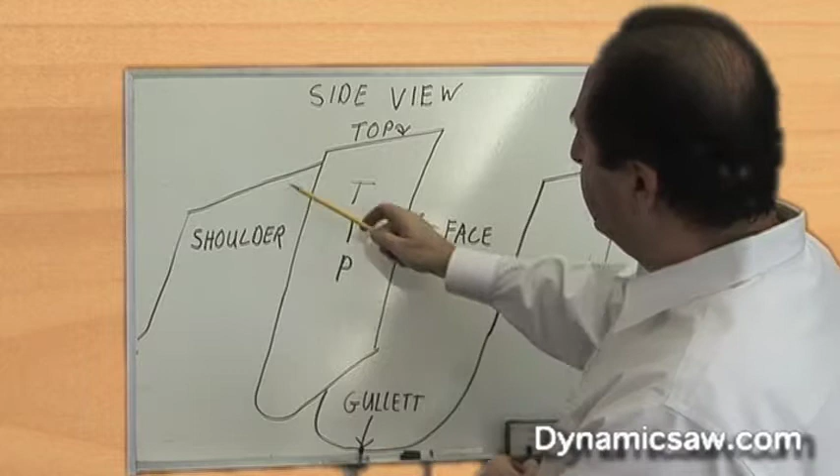We're looking at the side of your saw blade on a really close-up view. This is the actual carbide tip, this whole portion here. This is the shoulder, or the steel part of your saw body. All this down here is steel that the saw tip is brazed into. So this is the tooth tip, this is the shoulder. The face of the tip would be right here, this whole area is the face. This whole area up here is the top of your tooth.

When we sharpen your saw blades, typically we remove 3 to 4 thousandths of an inch off of the face of the tooth, and 6 to 8 thousandths off the top of the tip.

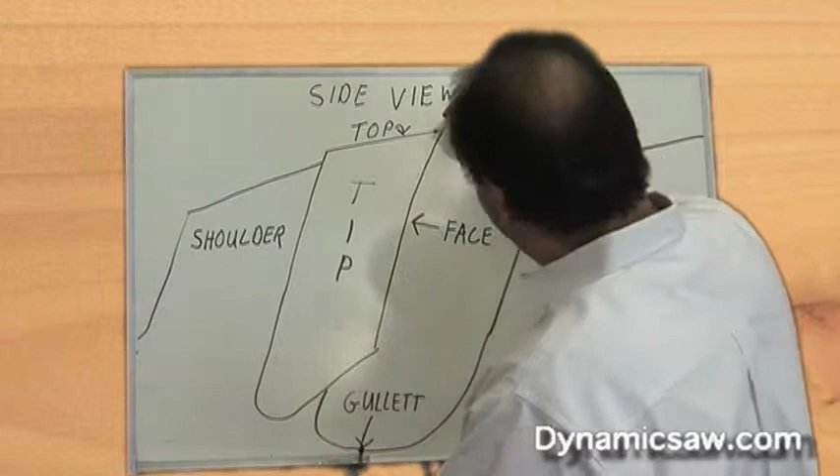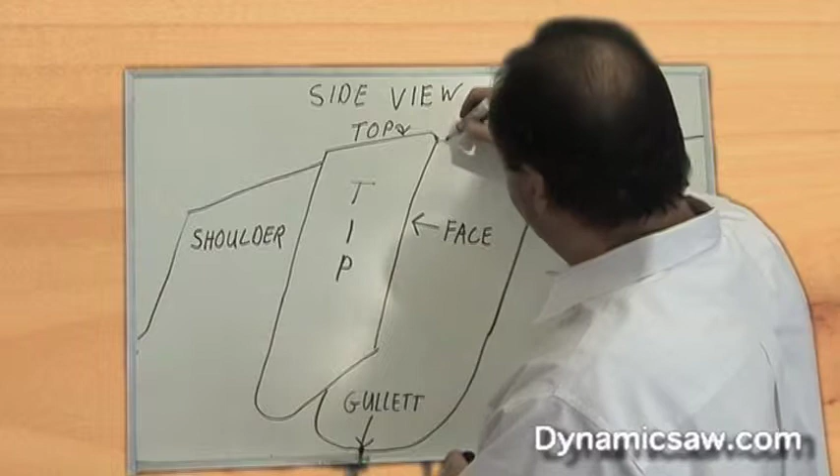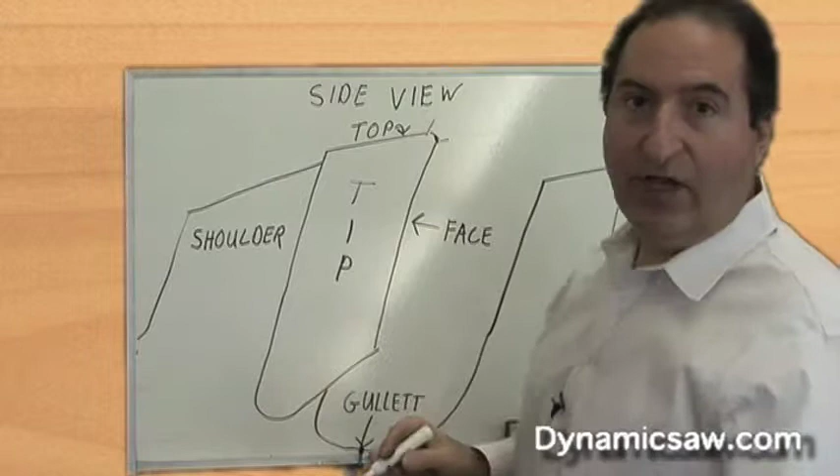Let me draw something in here. Let's say there's wear on your saw blade and it's worn right down to there. If I were to take all that off the top of the tooth, I'd have to come down this far off the top. We don't just do that. There are some companies that only top grind. There are other companies that only face grind, and they'd have to remove that much of the saw tip to get your saw blade sharp. We face and top grind, so we leave as much tip as possible.

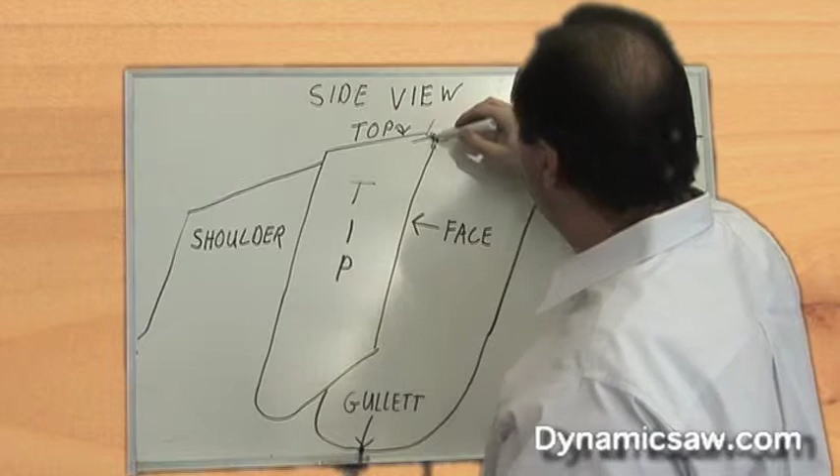It's really hard to draw on the scale that I'm doing right now, but by facing and topping, we'll get probably 15 to 20 sharpenings for you out of a standard carbide tip, and you get the sharpest cutting edge possible by doing that. We expose new tip itself on the face and the top. It gives you the longest life and the sharpest cutting edge.

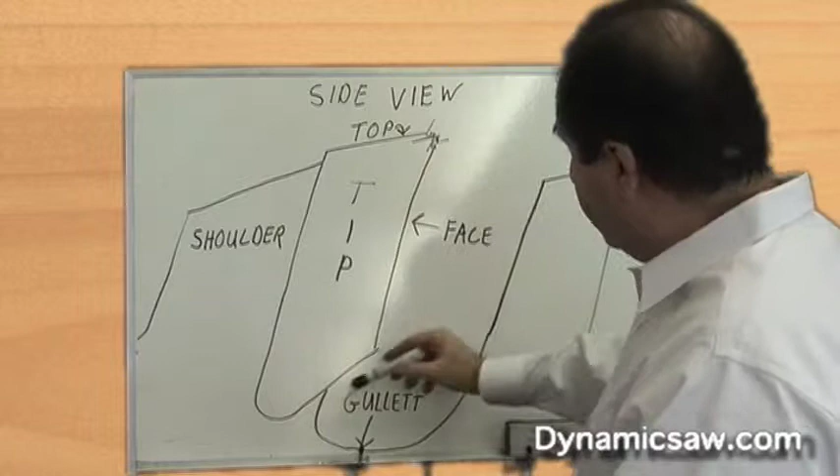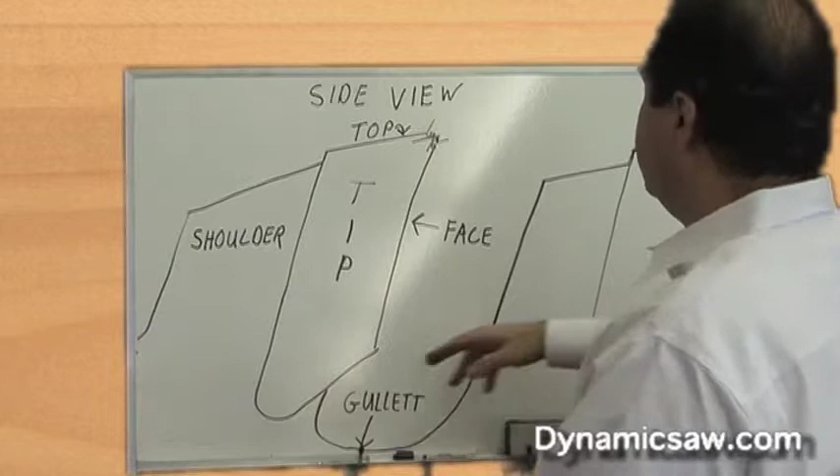This portion down here is critical. This is called the gullet. At the bottom of your sawtooth, as this blade is cutting material, the chips are being funneled down into the gullet. When the saw blade exits the cut on the bottom, it dumps or ejects all that material out.

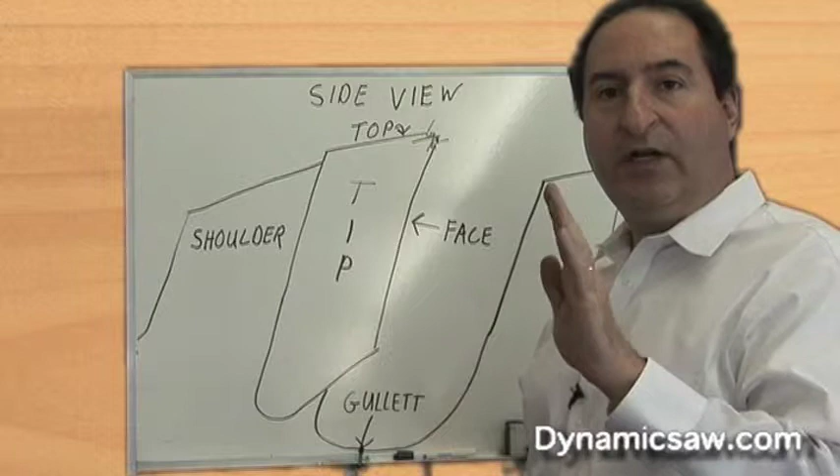That's very important for keeping the saw blade cool. A cool saw blade stays flat. As steel or the body of your saw blade absorbs heat, it's going to start to wobble. We want to keep that as cool as possible. So we want the sharpest cutting edges and a nice big gullet to throw those chips out of the way.

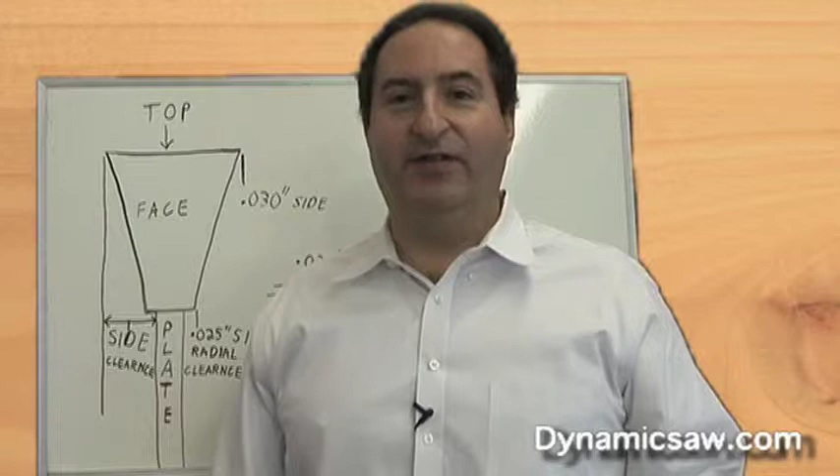Right now, I'd like to get a little bit deeper into saw science than you probably ever wanted to get into, but I think you're going to be happy that you watched this clip, because you'll find out why your cuts are really smooth. For any of you woodworkers wanting to do glue joint rips, or if you're cutting corian and you want perfect joints, or if you're cutting a piece of plastic and you've been having melting issues, I think this clip is going to really help you.

For this clip, the picture that I've drawn on the board, this is your saw blade. It's like it's spinning directly towards you. The face of the tooth is now coming directly at you, like you're the material, and that's the view I've drawn on the board behind me. This is a close-up, the best rendering that I could do freehand, of the saw blade coming directly at you. This is the face of the carbide tooth.

This is the top of the tooth. This is a straight top saw blade. This is the plate, or the body of your saw blade. Your arbor would be down at the bottom of the picture.

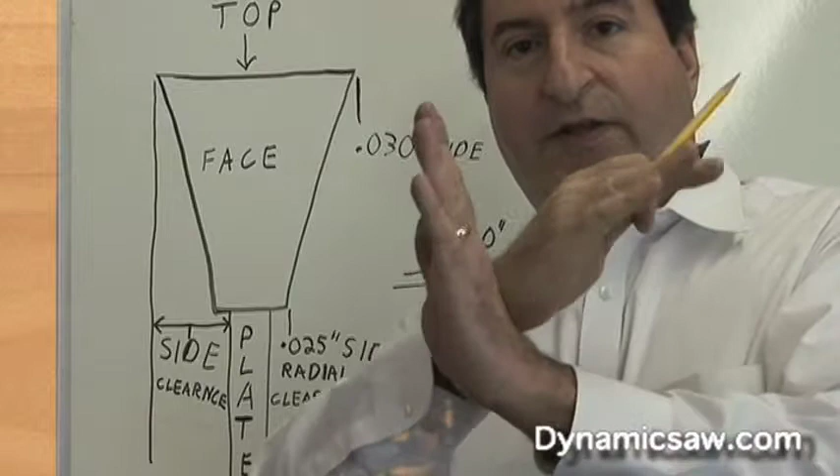Now, carbide saw blades are made different than steel saw blades used to be. Steel saw blades used to have the body of the saw, then the teeth used to be set left and right. That's called set. On a carbide blade, they're much, much more accurate, because we want a saw plate that's been smithed perfectly flat, and then the sides of the teeth have been ground with built-in clearance angles.

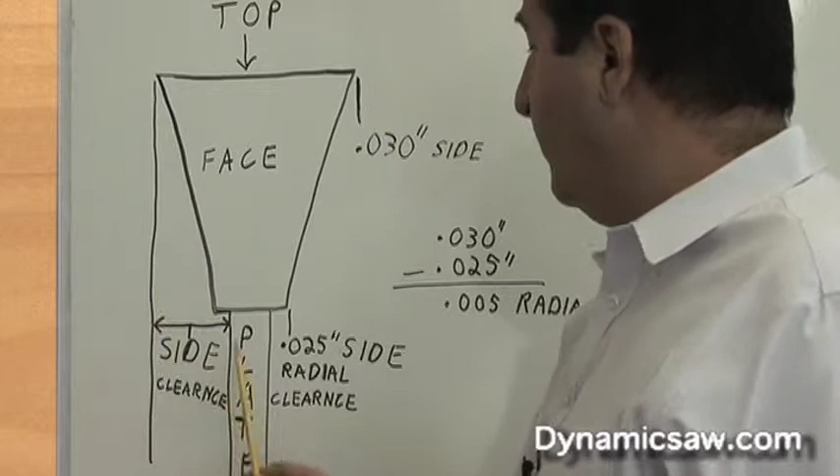When your saw blade is manufactured, it has a built-in top clearance angle, which I have to draw a different view for. It has a built-in side clearance over here. That's the distance from the top of the carbide tip to the saw plate itself. That's what side clearance is.

So we would take an indicator, we would measure from the top corner here to the plate. This particular blade, the way I've drawn it, has a 30 thousandth side clearance. Then there's another angle called radial clearance, which is super important when we're looking at the finish of your cut.

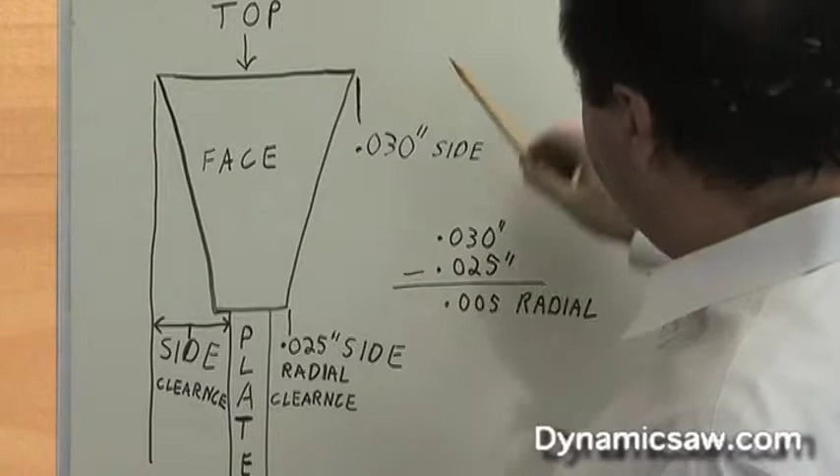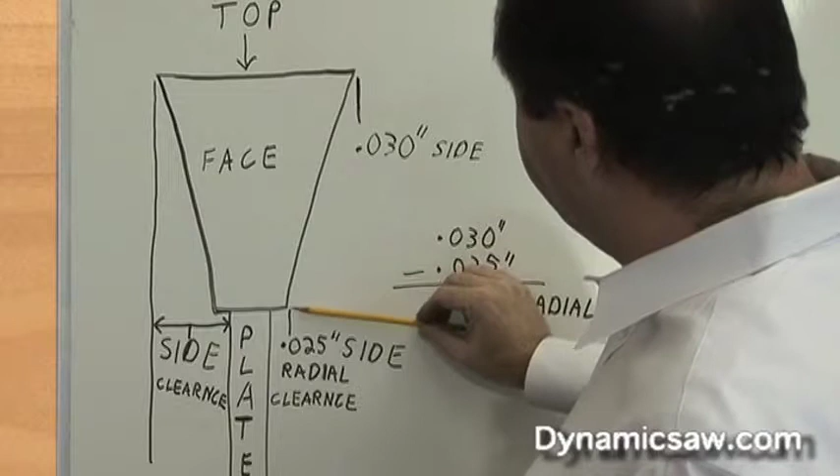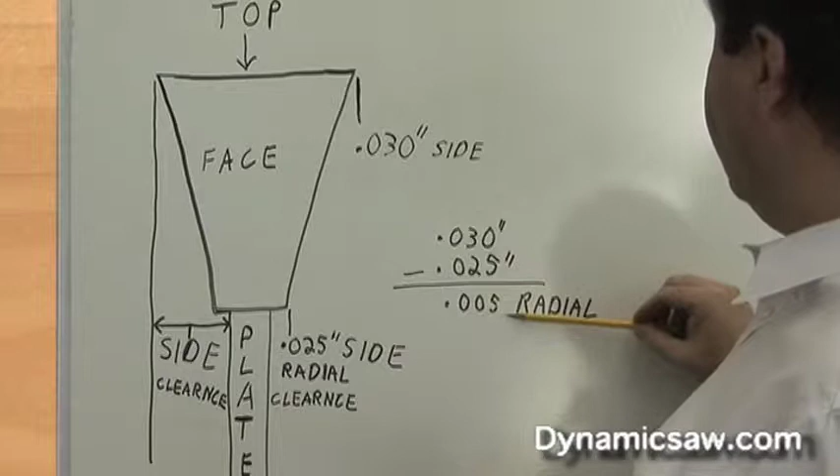Radial clearance is determined if you take an indicator and measure from the exact corner of this tooth. For this illustration, it's 30 thousandths of an inch. Then you come down to the bottom of your tooth, which has 25 thousandths side clearance. So 30 thousandths minus 25 thousandths gives us 5 thousandths of an inch radial clearance, which is wonderful clearance for doing most woodworking.

Forgive me, my hands are now the sides of your saw tip. This would represent a saw blade that has high radial clearance, very far apart at the top, close in at the bottom. That blade is going to cut very cool.

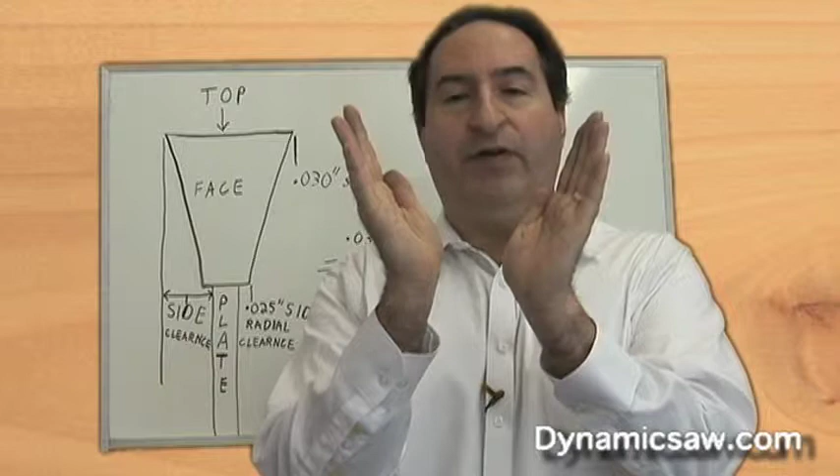If you're ripping a board and you want to get through it with an easy push, and you're not really concerned about edge finish because you're going to joint it afterwards, you want a blade with a lot of radial clearance. Also, if you're using a low horsepower saw or running on an extension cord and you keep popping your breaker, you want a high radial clearance saw blade. It's going to push very easy.

Conversely, if I want a really smooth cut or a glue joint rip, I want low radial clearance. So I want the top of the tip to be almost the same kerf as the bottom of the tip. That's going to give you a mirror edge on the side of your wood.

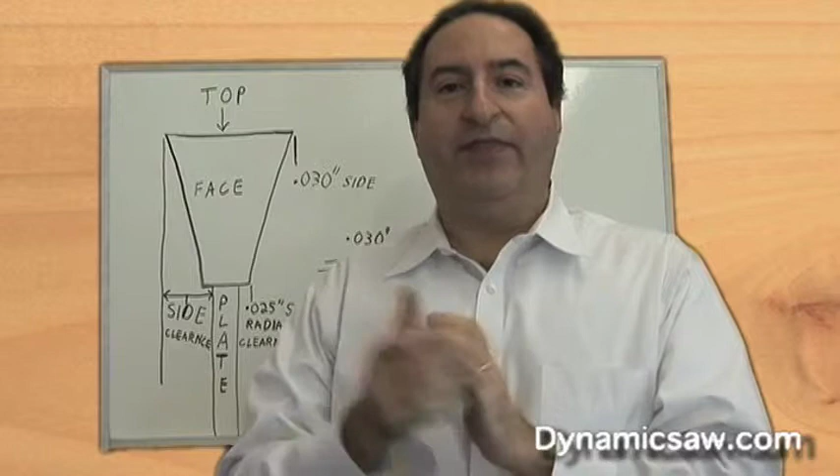Actually, we've had to make saw blades a little higher radial because we've made saw blades cut so smooth that the glue doesn't want to adhere to it - it's too smooth of a cut. So you don't want no radial clearance, and you don't want too much radial clearance. It has to be made for your application, and we can give you recommendations on the proper radial clearance for what you're doing. That's why Brian and I will ask you a lot of questions about your application, what machine you're using, how much horsepower you have, and what type of finish you're looking for. All those things help us give you the proper saw blade.

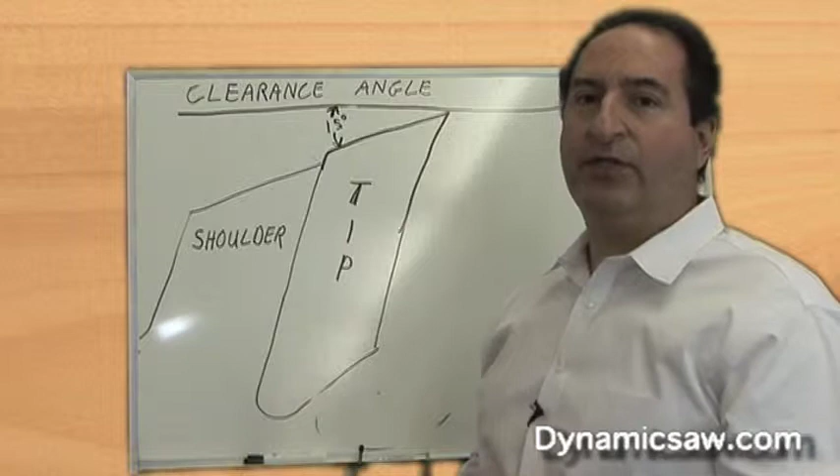We have some very specialized clearance angles that we've tried over the years for different materials. But a good rule of thumb is if you're cutting a soft material, which wood would be compared to steel, we'd use a clearance angle like this, a 15-degree clearance angle. The denser the material you're cutting - if we're cutting aluminum, we're going to alter the clearance angle; if we're cutting brass, we're going to alter it, all the way to steel. When you're cutting ferrous steels - and believe it or not, we sell a complete line of saw blades to cut ferrous metal with a carbide tip circular saw - we want a lower clearance angle. But just so you understand, this is what a clearance angle is.

In this clip, I'd like to describe to you what kerf is, just so when we're talking on the phone you know what it is. The kerf of your saw blade - if this is the saw plate, and this is the face, like the blade were coming directly at you - the kerf is the widest part of the sawtooth, which would be the very top corners. If the blade's made properly, it's the top corners. That is the kerf of your saw blade.

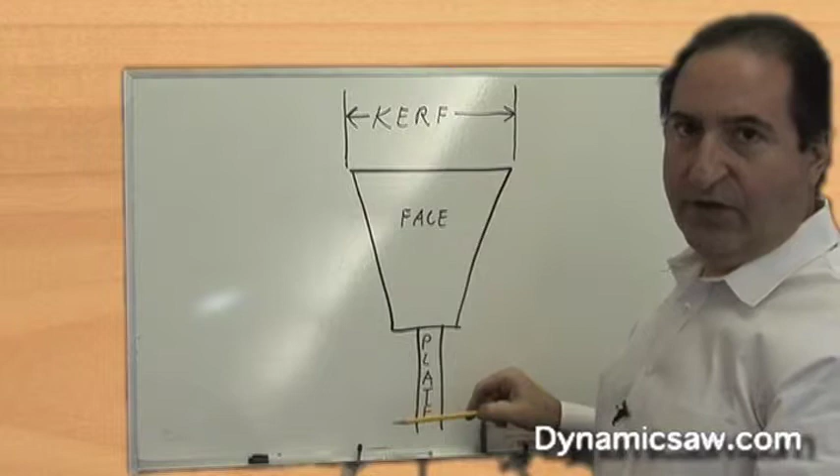There's some good rules of thumb. If your plate thickness is an 85 thousandths thick plate, then a standard kerf is a 1/8 inch kerf. If you have a 120 plate, 180 thousandths kerf is standard. There's some standards in the industry, but everybody does different things. Some of you guys need thin kerf saw blades. We have saw blades down to, I believe, 55 thousandths of an inch kerf, so the saw bodies are down around 35 thousandths - very unique for very special applications.

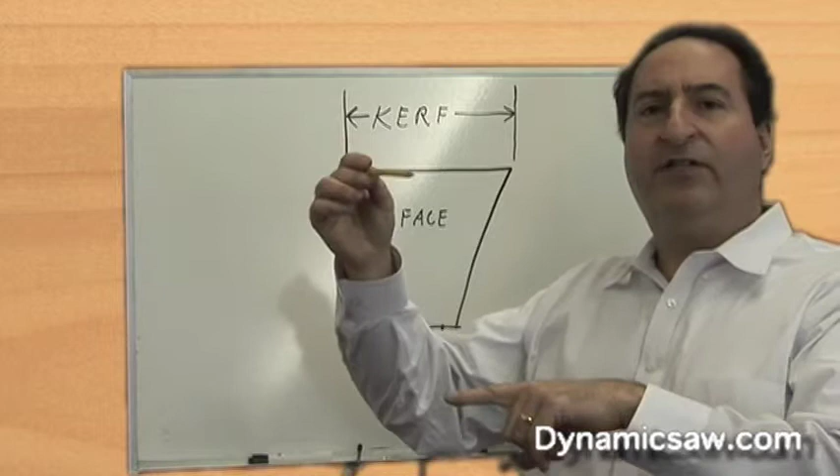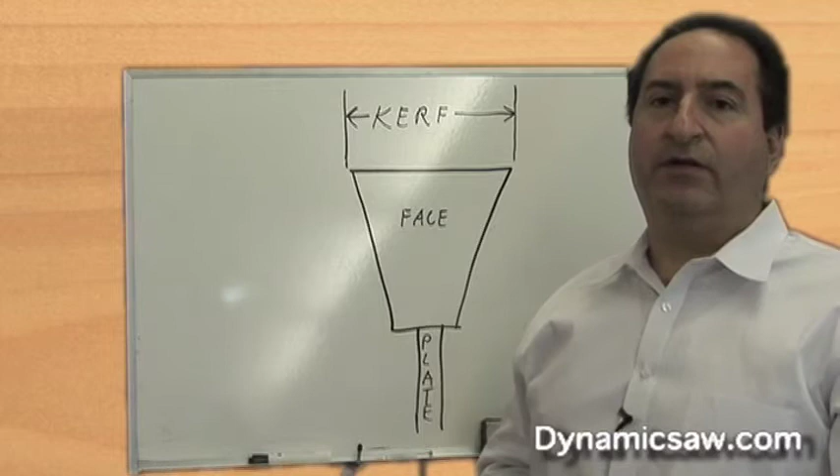You might need a very heavy saw body. We had some customers cutting - they were an MDF plant, and they were cutting 8 inches thick MDF 24 hours a day - and we had to make some heavy saw bodies for them. They were getting up into cutting hundreds of thousands of feet in a shift. So there's different requirements, but kerf is the maximum amount of material being removed in one rotation of your saw blade.